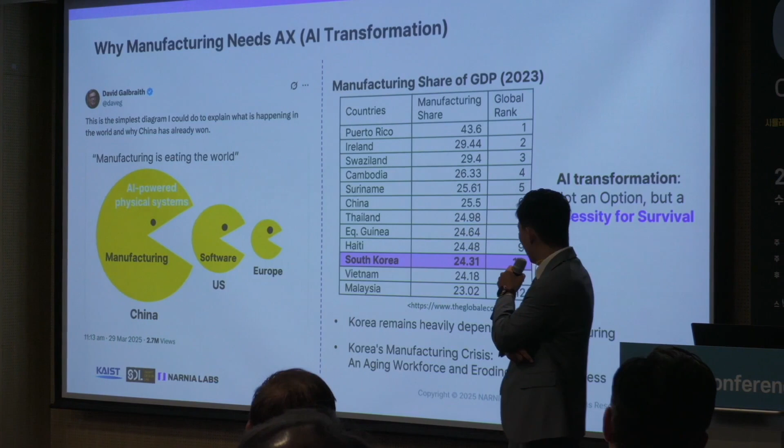It's changing. As you all know, manufacturing accounts for over 24% of our country's GDP. Even now, if you look at the rankings, we're in the top 10 globally. In fact, since the percentages are almost identical, it's safe to say we're tied for 6th or 7th. Our country is still heavily reliant on manufacturing, but you're seeing the problem in all industries, right? With population decline and a shrinking young workforce, there are hiring issues, hiring experts, and falling behind China in terms of price competitiveness. We're bound to fall behind in the competition for scale.

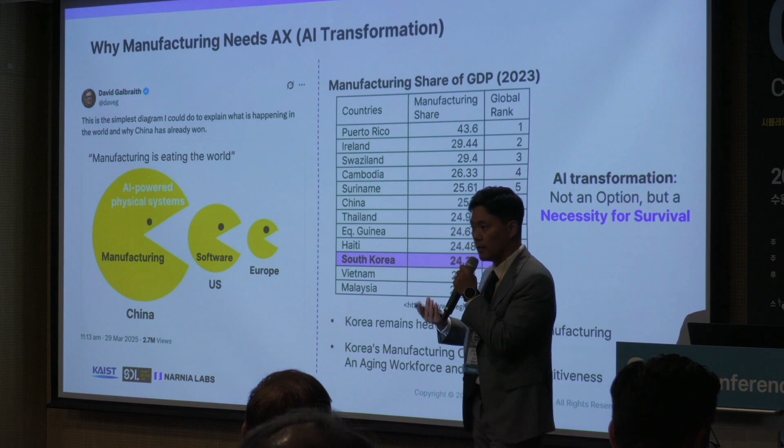So AI isn't the answer—it's not the only answer, but no other solution seems to be working. So we're now focusing on AI in manufacturing. I feel that innovation is not just an option, but truly a necessity.

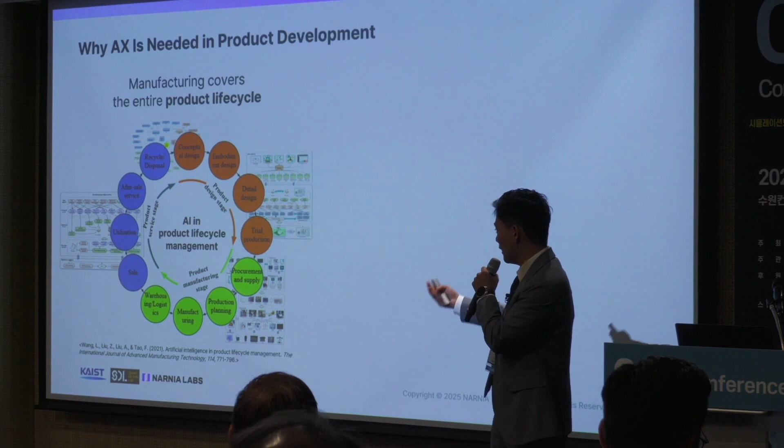When we talk about manufacturing, many people tend to think only of production, but in reality, manufacturing actually covers the entire product life cycle: planning, design, building, testing, production, distribution, management, after-sales service, and delivery. There are so many different specialized fields connected, including recycling.

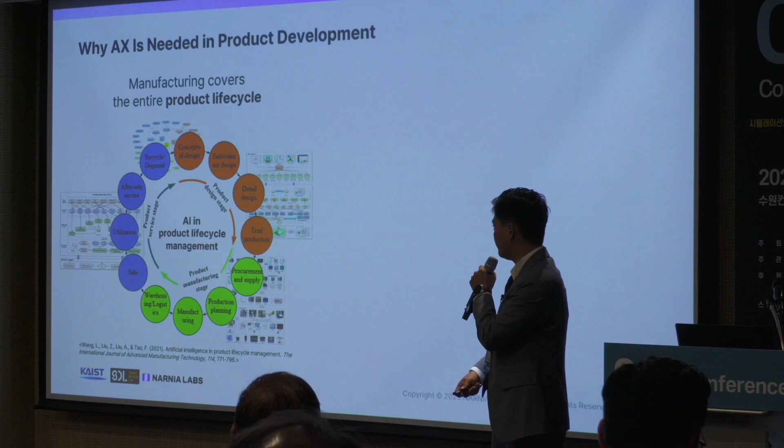If we make a table with added value for these fields, there is something called a smile curve—it looks like a person smiling. So when we look at it from the production perspective, the pre-production and post-production stages have high added value. In fact, we are jumping into that world. There are a lot of companies at both ends—the pre-production stage and the post-production stage—and many companies have made progress at both ends.

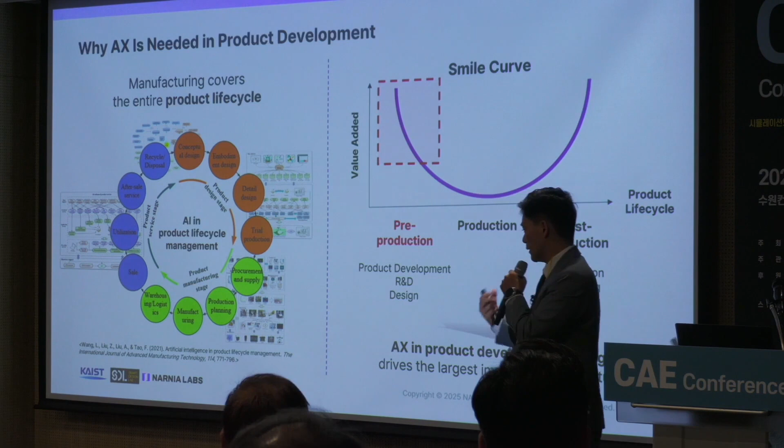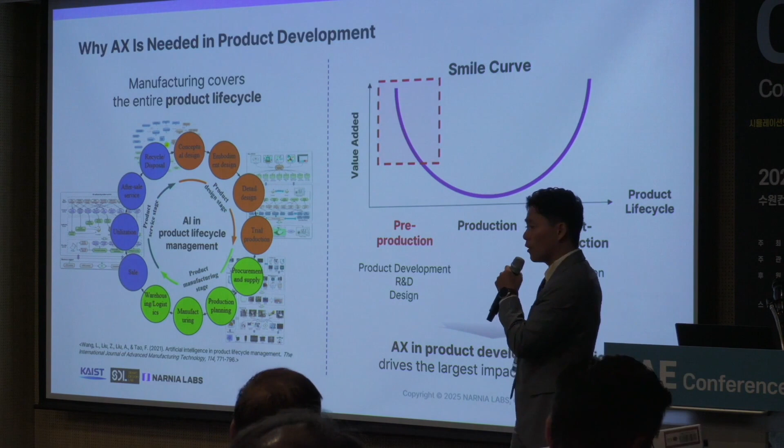So in the pre-production stage, before manufacturing and production, major work such as product development, R&D, design, and branding takes place. That means ultimately, if we innovate high-value-added areas with AI and achieve AX, the effect will be great. From our country's perspective, that's why we focus on product development—we can only truly see meaningful results if we actively innovate and improve that process with the help of advanced AI technologies. Of course, all areas and aspects are important and deserve attention.

Oh yes, I completely agree that AI is necessary for product development and design in Korea, especially as the industry evolves. Let's think about how engineering design is changing with AI from a broader and more comprehensive perspective. Here's my perspective on this important topic.

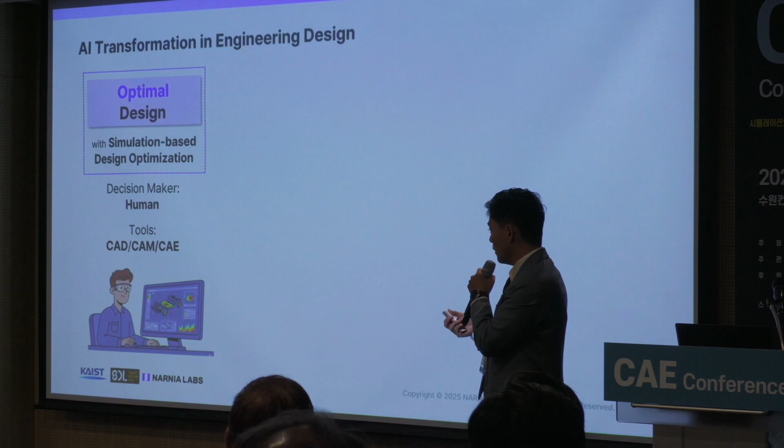I've been practicing optimal design for decades. My advisor was someone who spent his entire life practicing optimal design, and I learned from him. In a way, the most utilized optimal design is simulation-based optimal design. You all have many great CAX tools—CAD, CAM, CAE, etc. By using those computer-aided tools, people can do it faster and more efficiently. It was a time when we were developing products and we could optimize them.

However, we have been working hard at Narnia Labs and KAIST to transition from optimal design to generative design. Generative design attempts to change the paradigm of existing design by using generative AI technology as its core.

So now we have another great resource called AI for humans, but it's still not that great. Decision makers are people. Even though better tools have been developed, decision makers are still people. There is still a long way to go in the industrial field.

Generative AI isn't widely deployed in industrial settings yet. There's still much work to be done, and we'll focus on it, but we must continue to look toward the distant future. Then I believe the next era will be the era of autonomous design, or what we call agentic AI.

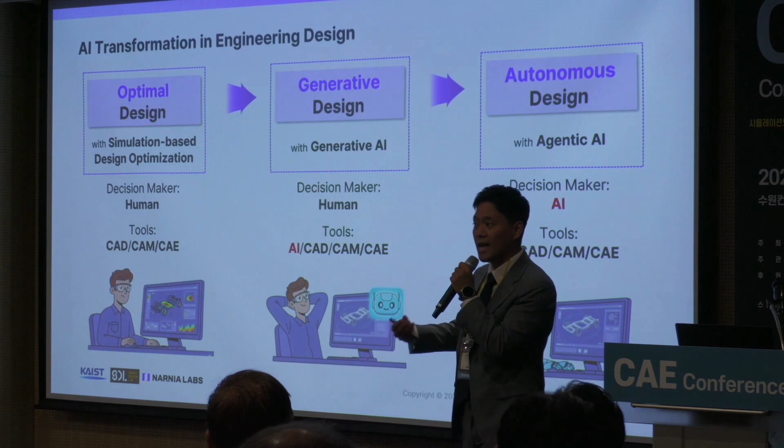I'll share my opinion on the differences between generative AI and agentic AI later. The key difference is that the decision maker is no longer a human, it's AI. The era of AI using AI to design is coming. While people have been focusing on designing using AI, the era of AI using AI to create good designs will come. Of course, people will also be involved.

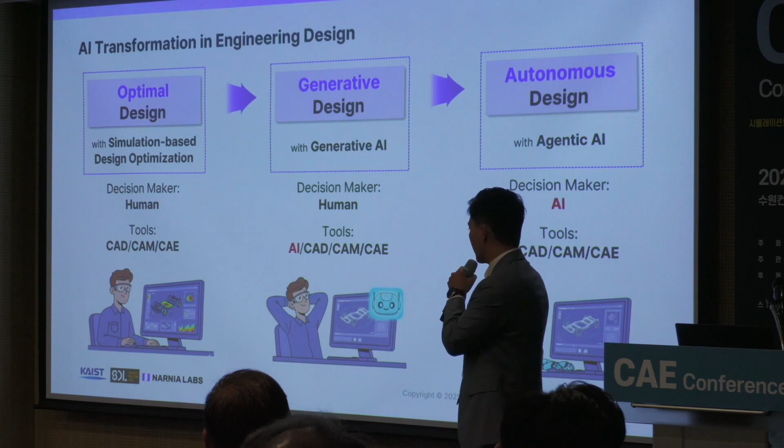Ultimately, it will likely be AI that performs evaluations and oversees the process. But it seems likely that many roles will be assigned to AI. So, within this larger picture, I'll first show you the efforts that Narnia Labs and KAIST have made in transitioning from optimal design to generative design, and then explain how we define the problem.

When we say simulation-based optimal design, the following process is followed. First, we define the problem. Defining the problem means defining the objective function, design variables, and constraints. Then, in the case of shapes, defining design variables means parameterization.

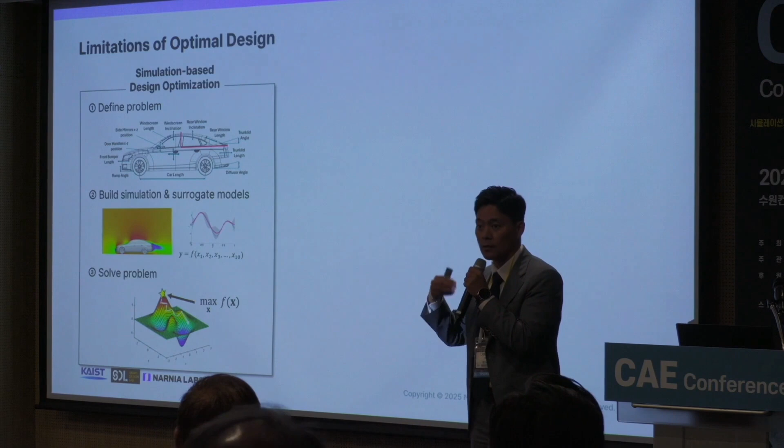So, after defining the shape with a small number of parameters, we change them and run a simulation. We gather that data, use machine learning techniques to create predictive models and surrogate models, and then use an optimizer to find the optimal values based on those models. We've been doing this consistently for a while now.

However, this approach has one fundamental problem. First, the designs we're trying to create often can't be parameterized. This is because the geometry is so complex that it can't be expressed from x1 to x16. Current machine learning techniques typically require the dimensions of input and output to be small, right?

Secondly, even if I could express the design I want with many design variables, I couldn't create a surrogate model for it. Existing machine learning techniques can't structurally increase the dimensions of inputs and outputs. Finally, even if I made such a function or a surrogate model, when models are highly nonlinear and complex, finding the optimal solution is hard.

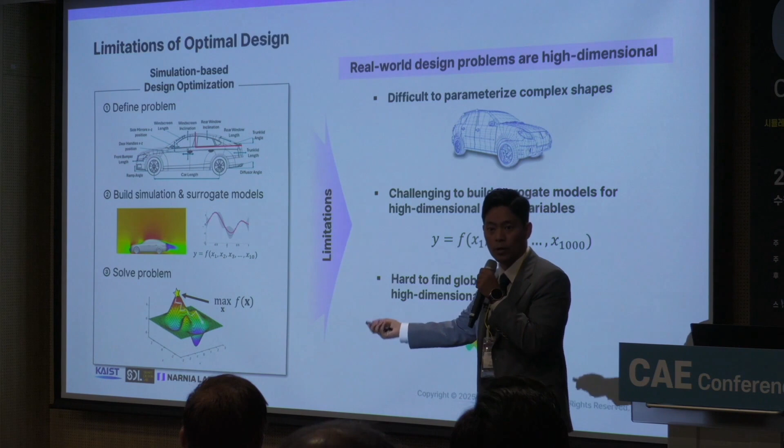So, the main limitation of traditional simulation-based optimal design is that real-world industrial design problems are extremely high-dimensional. So when we ask if AI can solve these problems, by AI I mean deep learning, which is the most prominent. The greatest advantage of deep learning is its ability to solve these problems.

It can compress a high-dimensional X space into a low-dimensional Z space. This is the ability to represent something that would require thousands of dimensions using just tens of dimensions. This ability serves to perform feature extraction or dimensionality reduction, which reduces the number of dimensions.

So what does this enable? Since it can extract features on its own, you don't have to parameterize complex shapes. It can independently identify key features and use them as input to create a surrogate model.

This means you don't have to do parameterization. Second, since dimensionality reduction is possible, while it's difficult to perform optimal design in 1,000 or 2,000 dimensions, it becomes much more efficient to do so by reducing it to 10 or 20 dimensions. And that low dimensional space is also well suited for generating new things. So from that perspective, this single page essentially contains the theoretical framework for performing generative AI-driven design optimization.

So there are three main modules: generative AI, predictive AI, and optimization AI. First, let's look at the meanings of X, Y, and Z. X represents the design, Y represents the engineering performance, and Z represents the compressed space. It's the space that deep learning has compressed X into.

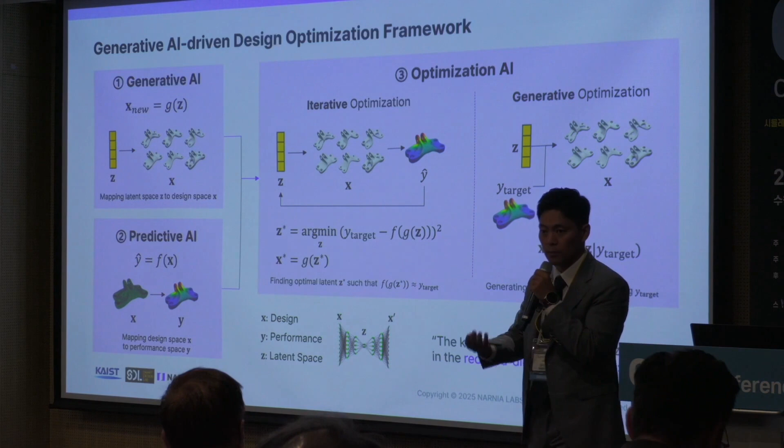The second method is to make the generative model conditional. So while you're still creating X from Z, you also input the desired engineering performance, Y. This is like telling the model, find a design that satisfies this engineering performance, or optimize for it, or generate it. So to summarize the key idea in a single sentence, the advantage of performing optimal design with generative AI is that you can do it in the reduced dimensional space.

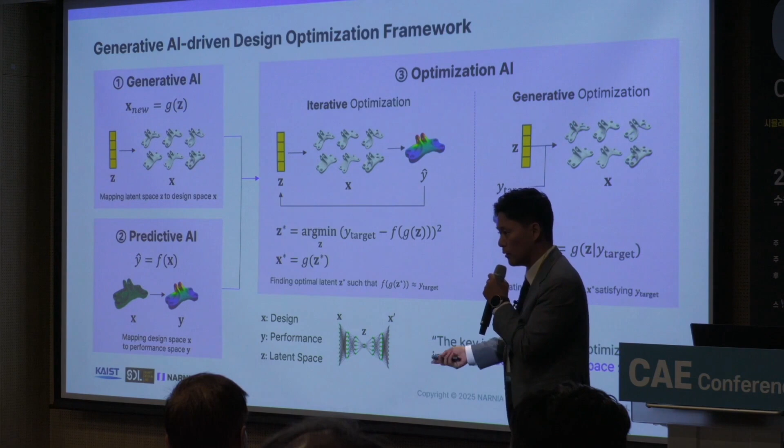All right, so, well, there won't be any more mathematical formulas from now on, so you can relax and just watch. AI is now multimodal, so 3D data, 2D data, and 1D data can be input in any combination, and 3D, 2D, and 1D results can be output in any combination. So the data you typically use for design can all be represented this way.

3D would be, say, CAD, and 2D could be an image from a specific view, or design, or an image from a specific view. And 1D typically represents all numerical values that can be expressed in Excel, like material properties, all those kinds of values. And the outputs could be values from CAE analysis or results from testing.

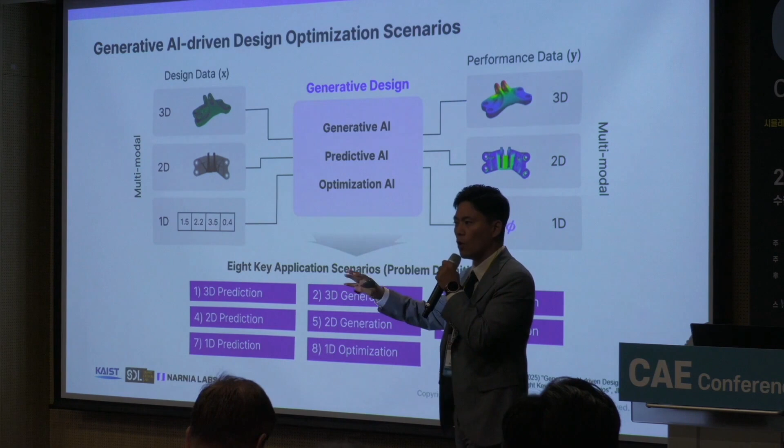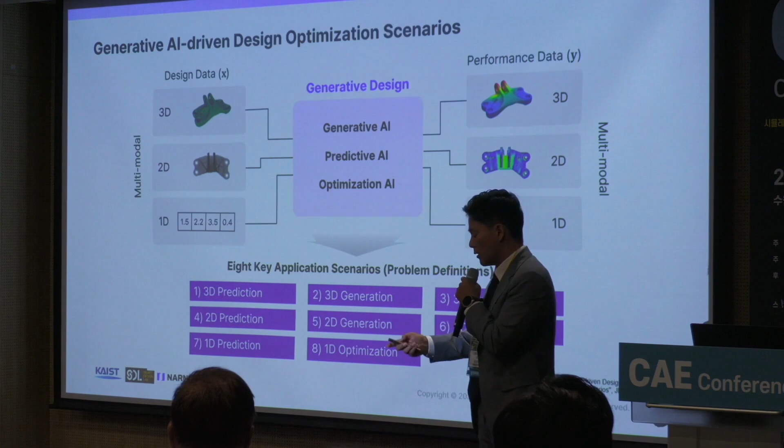Thinking along these lines, by combining these different modalities, we can categorize the common problems we're trying to solve. It's like creating a menu, in a sense. So we have 3D generation, 3D prediction, 3D optimization, then 2D generation, 2D prediction, 2D optimization, and 1D prediction, 1D optimization, and so on. Based on our experience, we've defined these problems.

First, let's consider a 3D design scenario. For 3D prediction, as you can see at the top, when we think about making a prediction, after the AI model has finished training, we provide it with a 3D CAD as input. Along with that, we provide the boundary conditions as 1D data. The AI will then predict the results of a CAE analysis or a test.

And when it predicts, it can predict 3D field values, or it can predict 1D scalar values. A 1D scalar would typically be a maximum value, or global stiffness, or something similar, while a 3D field value would represent all the nodal values.

Furthermore, the prediction can be divided into static or dynamic. Are we trying to predict a value at a specific point in time? Or are we trying to make a transient prediction as a time series? You need to use the optimal models that are appropriate for each case.

Once the prediction is made, we can then move on to generation. For generation, as you see below, we provide conditions to the generative model, the design requirements we want, and it generates a corresponding X. So ultimately, since we have both a predictive model and a generative model, we can connect the two.

So you can generate, then predict, then generate again, and predict again. Or you could even embed the prediction within the generation process, so you can generate while predicting. This way you can find an optimized 3D design. This is, in a sense, a very abstract representation of the process.

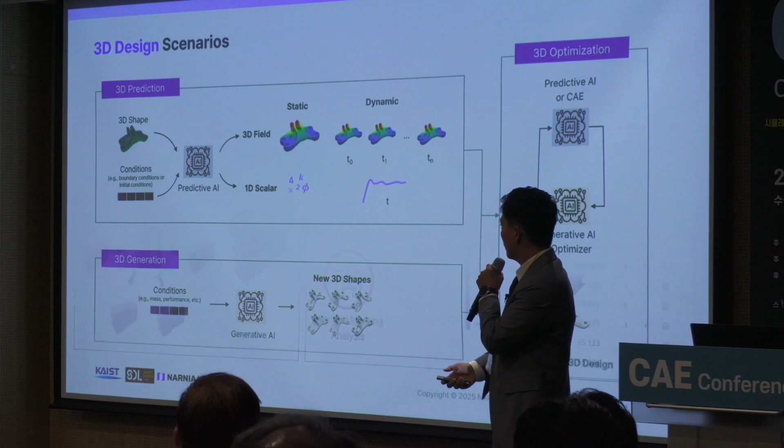Now, let me show you a real example. As a case study, this is a design for a molded case circuit breaker. From a 3D generation perspective, we start by non-parametrically generating various cases without parameterization. And for parts we want to change in detail, we can also apply deformation. This allows us to create a variety of CAD models.

We then train a deep learning model on the analysis results of these CADs to predict structural performance or outcomes like injection molding. Now that we have a generative and a predictive model, we can optimize as mentioned earlier. This lets us find the Pareto front, which is good structurally and for productivity. We can also rank each design alternative.

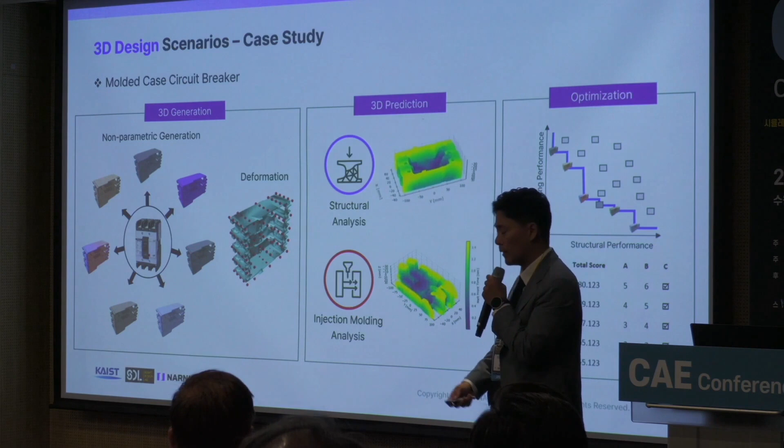However, some of you might be thinking, well, there are so many open source options these days. Can't I just grab some code from GitHub, train it on my data, and get a decent result? Yes, well, that might be possible. It could be. But here's the problem.

In this particular study, the data we received from the company consisted of just 28 shape data samples. We need to learn 28 pieces of shape data, and the 3D generation research in computer science, as described in the paper, relies on enormous amounts of data. And that data isn't our manufacturing data, but rather the small, bulky shapes typically used in the metaverse or games. The data we're trying to learn is always sharp, thin, and detailed, and it's a completely different domain altogether.

So when you think about it with a model learned in a different field, the expression open source comes out like that. Of course, I can't use it.

So if we do a very good and thorough job of pre-processing and optimizing the data to best fit the specific characteristics of our data, it really starts to take shape a little bit. Still, it's not enough. Then we choose the one that best suits our manufacturing data. We must tailor and optimize our data and model for manufacturing.

We need to create it, and then things get a little better, but it's still not enough. So purely data-driven design still has its limitations. So we mobilize all of our existing design technologies, rule-based post-processing and pre-processing technologies, and combine them with data-driven design. Now we can start to create somewhat more realistic shapes.

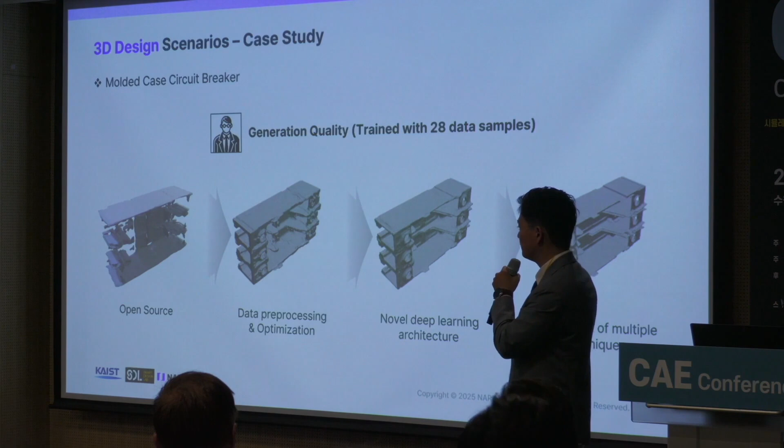In this particular case, we have now incorporated this 3D design into our CAD system as an API, which is an application programming interface. This is a case of collaboration with Siemens Korea.

For example, when designing a duct for a refrigerator, we input some specific engineering performance targets. Then, when we hit submit,

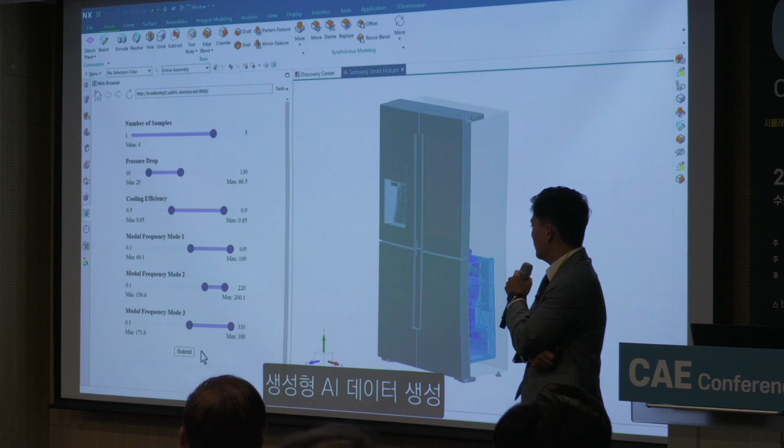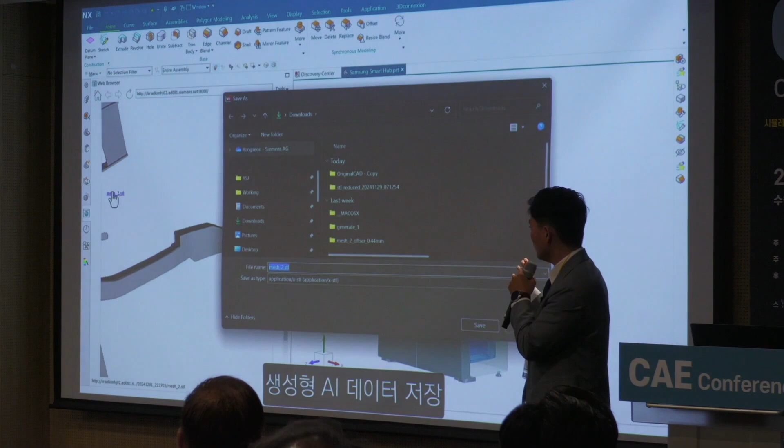I start by creating ducts behind the refrigerator, which is necessary to ensure proper airflow and help the appliance operate efficiently. In your approach, you created these ducts parametrically, meaning you used adjustable parameters to define their size and properties, making it easier to modify them later if needed.

However, in this case, you did not actually parameterize the ducts, so they were made with fixed dimensions, which can make future changes more difficult.

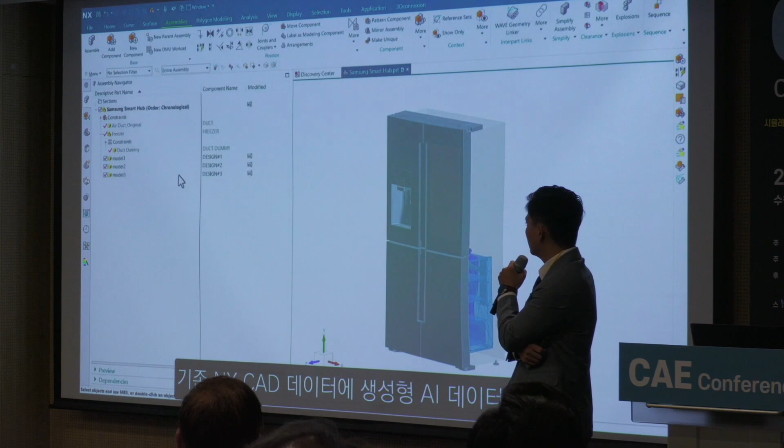After I finish creating the ducts, I download the resulting files to my computer. Once the download is complete, I upload these files to the server, which helps keep the project organized and ensures the designs are safely stored in a central location for future reference or collaboration.

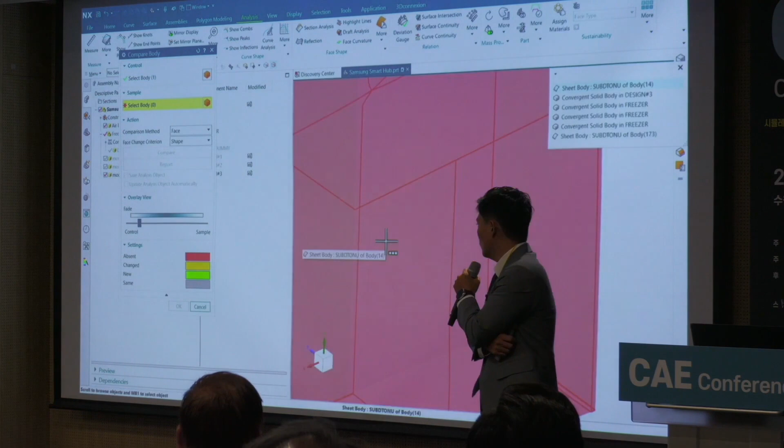I'll try it on my fridge, I'll stick it on to check its performance, and check for any differences with the original design. This was an example of how a trained AI model can be seamlessly integrated into an existing design process and workflow.

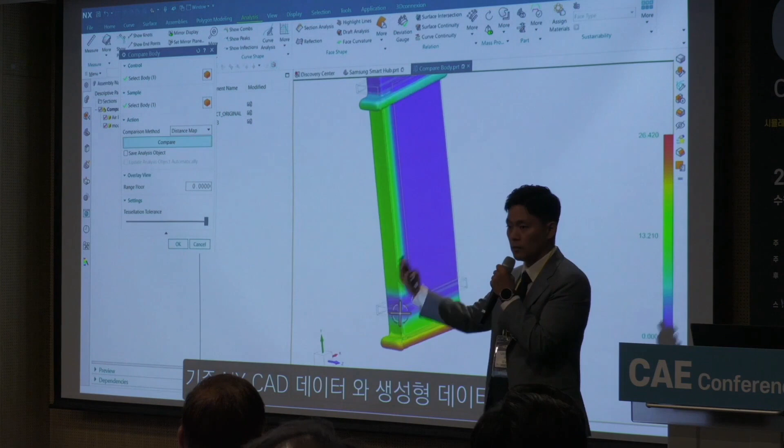So now that I've discussed 3D, let's move on to 2D. The concept is the same, but you might ask, why not just use 3D? Why use 2D? Well, since 3D is so complex, we're essentially reducing the problem to make it easier to solve.

Often a 3D CAD model can be adequately represented as a 2D depth map. In those cases, you don't necessarily need to keep the 3D data. You can just have it as a 2D depth map, or for many designs that have a uniform thickness, you may only need the cross-sectional information. In that case, you can just work with the cross-sectional design.

Using these representations, we can create a predictive model in the same way, just as we did with 3D. Now, for the generative model, directly generating in 3D is quite difficult due to data issues and the models becoming very heavy. But the advantage with 2D is that there are so many foundation models available, and we can leverage them very effectively.

So it's often more effective to first create a 2D depth map or image, and then reconstruct the 3D model from that 2D data. This approach works very well. By doing that, you ultimately perform the design optimization in 2D and then create the 3D model from it.

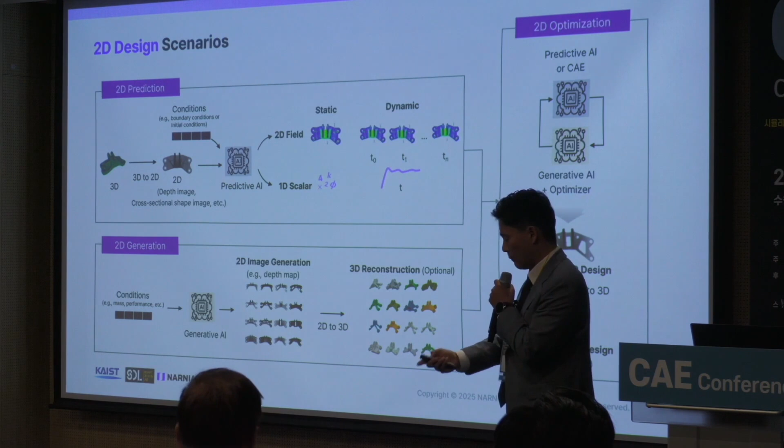Now for an example, let's take the case of a wheel. When we create a photorealistic wheel image like this, we're not just making an image that looks plausible. Instead, we predict the performance that would result from its 3D implementation. We consider factors like its stiffness and mass, and then create an optimized 2D image that meets those criteria. This is done by considering all the 3D properties.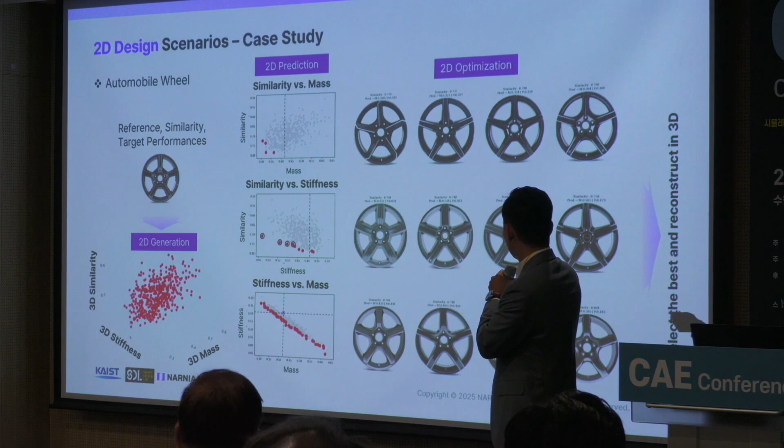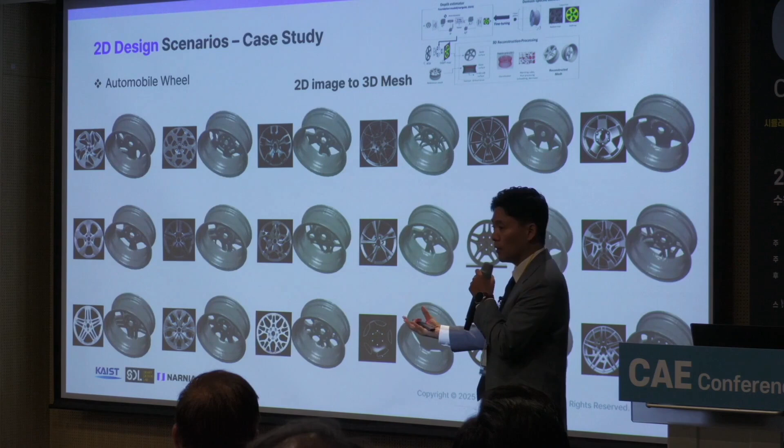Then using that image, we reconstruct it in 3D. After finding the optimized design, we use that design to reconstruct the 3D model. So for a problem that's difficult to solve directly in 3D, we temporarily move to 2D to solve it and then come back to 3D.

Now we're left with 1D. We've done 3D and 2D, so now it's 1D's turn. For 1D, generation is actually simple. Since it's already represented as a vector, changing the numerical values is, in itself, the generation process. Of course, you need to consider various probabilistic factors.

So then we can move directly to the predictive model. For 1D, the 1D table becomes the input, and ultimately, we again predict whether it's static or dynamic. But another thing we often do in 1D, although it's also possible in 3D and 2D, is multi-fidelity.

Most of you don't have a lot of high-fidelity data. The results from actual tests are very expensive, and the quantity is small. So we usually use low-fidelity data, like CAE data or 1D data, and utilize it effectively to make predictions. Once a prediction is made, 1D optimization is, of course, straightforward. You can just use the conventional 1D optimizer that we've always used. And then you can reconstruct it in 3D.

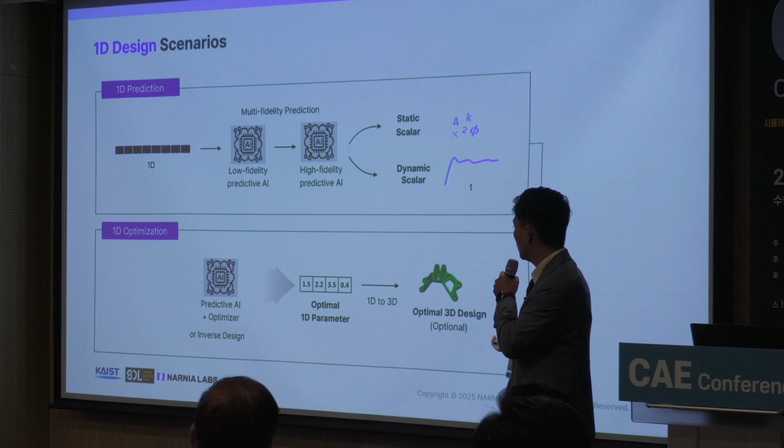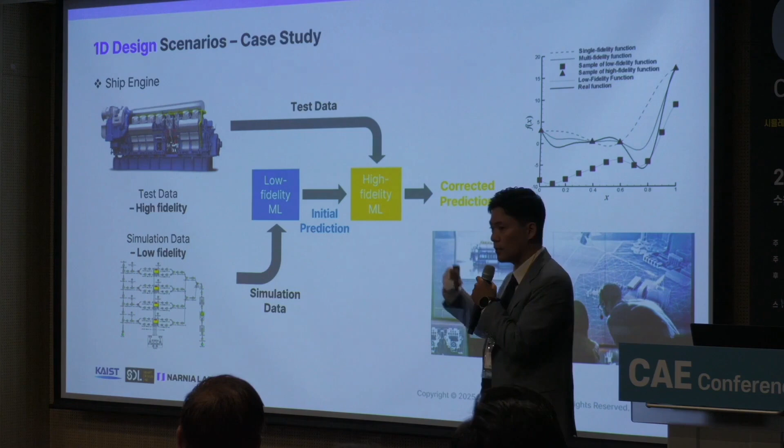As a case study, we had an instance where we predicted the performance of a ship engine. Test data for a ship engine is very expensive, so we used a 1D simulation instead. We gathered data for various edge cases from the simulation, trained both low and high fidelity machine learning models, and then combined them to achieve better predictive performance. That was the case study.

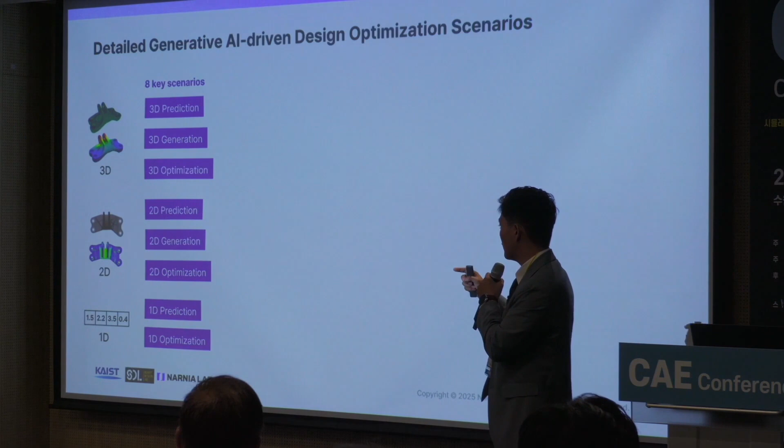So, looking at this, you can see that depending on the type of data we have, whether it's 3D, 2D, or 1D, we can divide our work into key scenarios: 3D prediction, 3D generation, 3D optimization, 2D prediction, 2D generation, 2D optimization, and 1D prediction, 1D optimization. And the detailed scenarios, as I mentioned earlier, depend on what we're trying to do.

Are we trying to predict a scalar or a field or a transient state? Are we just doing generation or conditional generation, or generating an assembly instead of a part? And are we doing iterative optimization or generative optimization? Many different combinations are possible.

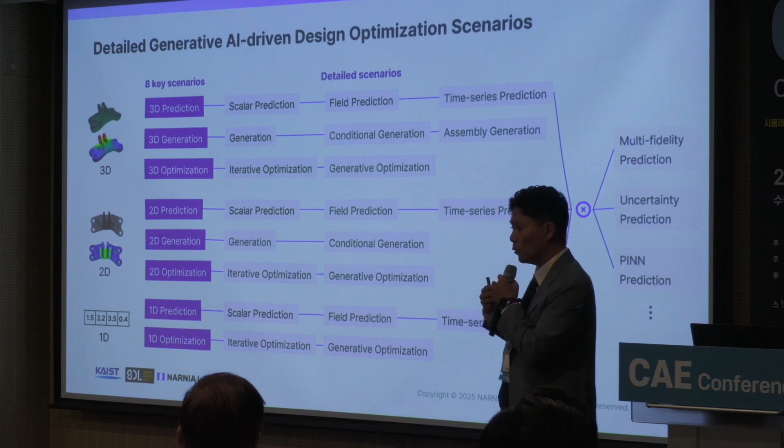Going further, let's say I want to improve predictive performance, then I can use multi-fidelity prediction. Also, if it's not just about the prediction itself, but I want to know how much I can trust it, I can predict the uncertainty. And of course, since data is often insufficient, we can also use predictions that leverage physical knowledge. So all these different combinations are possible. In a way, we've created a large menu of options. So over the years, we've solved about 70 different problems, and they all roughly fit into this menu.

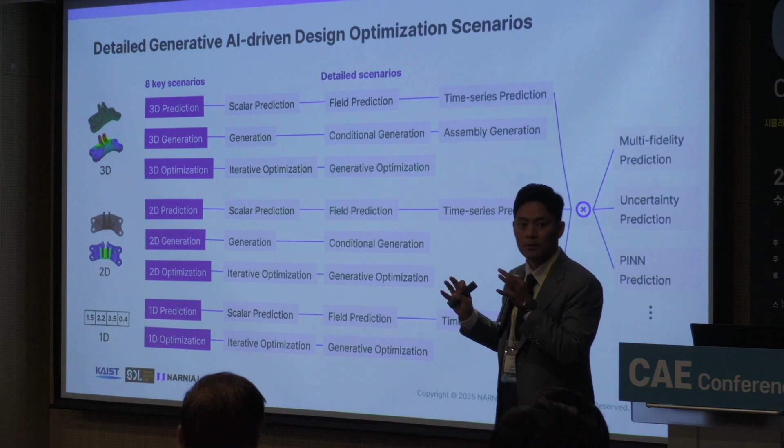So we've been solving a wide variety of problems like these. Typically, since automobiles have so many components and systems, and then there are electrical and electronics, power components, ships, robots, and recently, even small modular reactors, our applications have expanded to these areas.

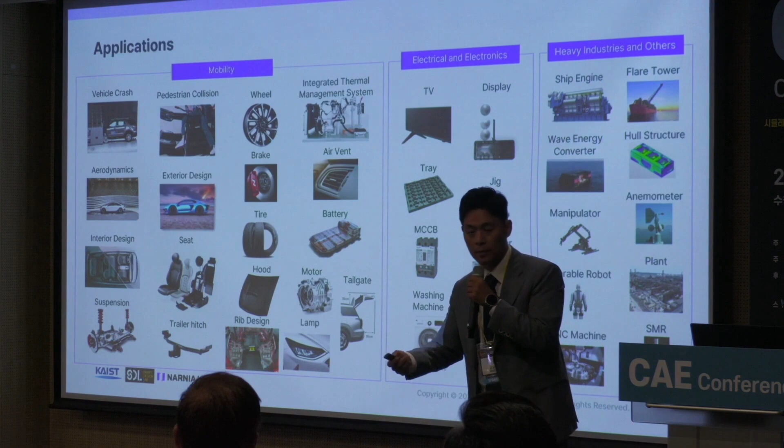We may know how to solve these problems, but how can engineers in the field easily apply these methods?

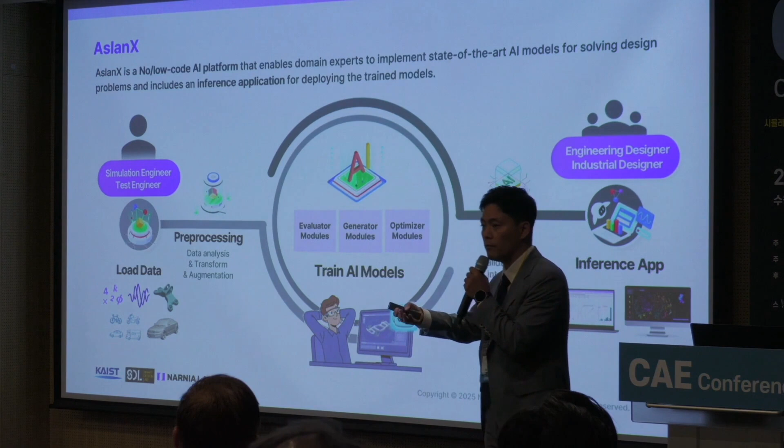Ultimately, what I wanted to do was create a tool. So we created a tool called AslanX. You can think of AslanX as a tool that allows experts in the field, like all of you, to easily train and deploy AI models. It's designed to seamlessly incorporate all of those scenarios.

So what does the user, the engineer, need to understand? They just need to understand this process, this flow. You import the data, and the tool automatically pre-processes it for the AI. Then you just define what the input and output are, the X and Y, and select which model to train. After it's built, you test it. And since other engineers will need to use the model you've created, you can then deploy it.

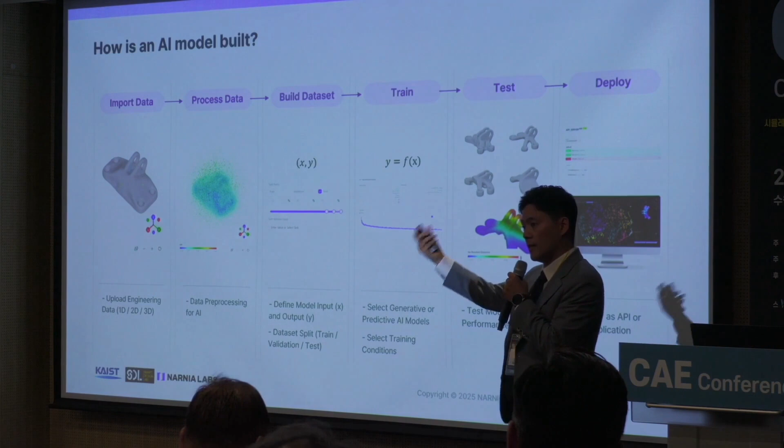These functions aren't performed through coding, but rather in a workflow format. Everything is done through a GUI. It's a format where you just need to change the values.

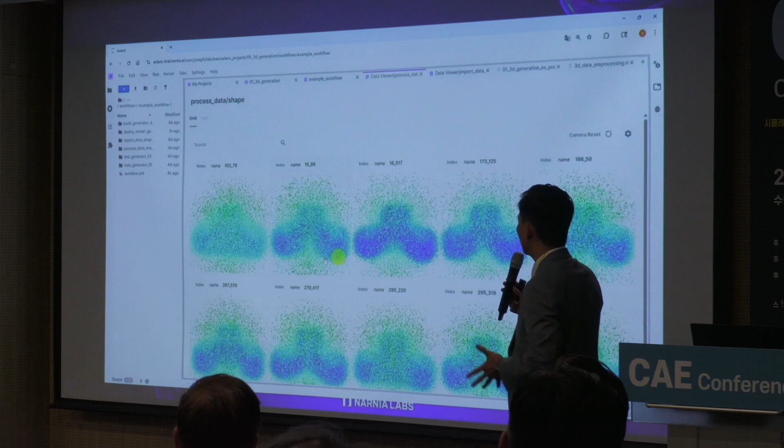So let me show you a quick demo. Let me show you the screen. You can train and pre-process 3D data like this, select a model, and generate.

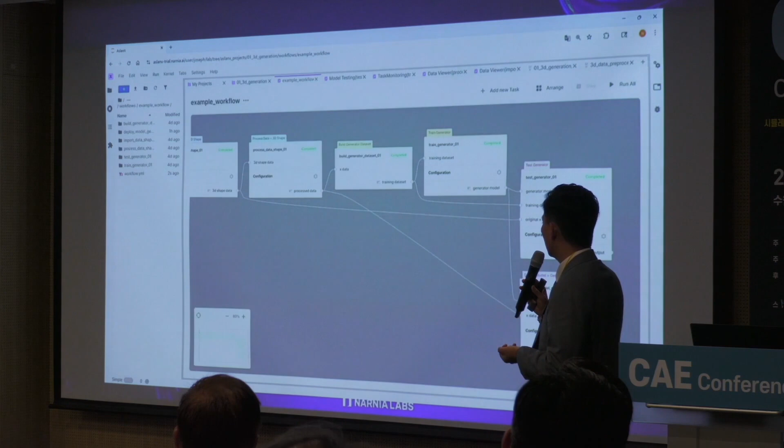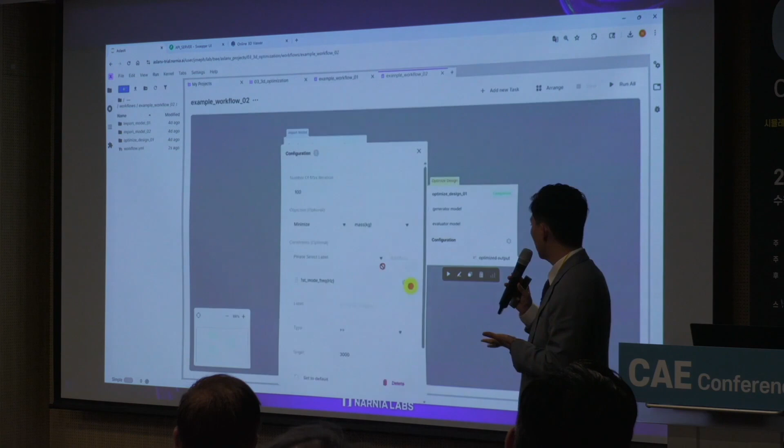You can also deploy the generated model as an API. The deployed model can then be wrapped into an app. You can import this analysis data, pre-process it, and then immediately predict the analysis results. You can immediately perform optimal design on the 3D results, and it handles 2D problems and 1D problems. So all the scenarios I mentioned earlier are implemented in this workflow format, making it understandable for engineers.

All right, so now what I want to discuss today is the final topic. We've worked hard on generative AI up to this point, but looking ahead, as we move toward autonomous design, what should we be thinking about? And what preparations do we need to make? I've been giving this a lot of thought myself.

So first, let's start with the terminology. I get confused myself: AI, agent, agentic AI. It seems there are slight differences in definition depending on who you ask. It's like back when the term Fourth Industrial Revolution first appeared and everyone was asking what exactly is the Fourth Industrial Revolution. However, the one thing that is certain is that as we progress from AI to agentic AI, the autonomy of the AI increases. This is a concept that everyone generally agrees on.

Whereas conventional AI was a simple form where we provide an input to get an output, an AI agent can select tools on its own and utilize them to solve problems. Then, when these AI agents gather and begin to collaborate, we call it a multi-agent system, which can solve more complex problems. And when autonomy is maximized to an extreme degree within that system, it's often called agentic AI. So in any case, the key aspects of this progression are autonomy, the ability to use external tools, and the capacity for collaboration. I think you can understand it in those terms.

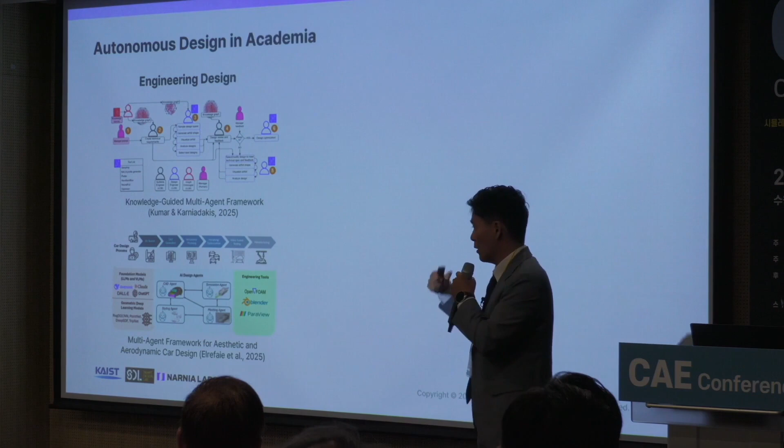So does this only apply to engineering design? No. In fact, if you think more broadly, it can include R&D, and even more broadly, it can include science. So if you look at recent studies using these multi-agent systems, a key characteristic is that they first utilize ontology. They organize past data, create a knowledge graph from it, and then utilize the relationships between different data points.

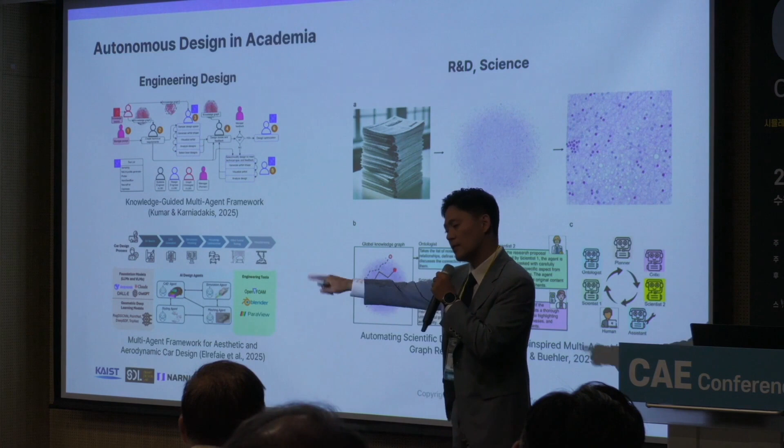And when creating this agentic system, they always include a critic, an agent that performs evaluations. So whereas in the past, AI was something that would start and finish in one shot, now it evaluates and keeps iterating to see if it's right or wrong.

So I took another look at these two perspectives, generative design and autonomous design. Time is flying. First, from the generative design perspective, as I mentioned, the human is still the decision maker, and the focus was on what should we make, what should we generate. I was like that too. But now with autonomous design, how to make it has become more important.

Because even to make the same thing, there are so many different processes and methods, how to collaborate to solve the problem becomes important.

In generative design, we kept looking at the design results, but now in autonomous design, we need to look at the design process. Instead of generating in one shot, it's about iteratively making and critiquing until the problem is solved. In the past, it was okay to be a black box because it just had to provide a solution.

But as we move toward autonomous design, if we're going to let the AI make decisions on its own, the results must be explainable. It made something well, but if you don't know how and why it was made this way, you can't trust and use it, right? As long as we entrust decision making to AI, it must be explainable.

And we should no longer look at it at the component level, but at the system level. It shouldn't be done in a siloed state, but in a networked state, linked with all other tools and systems.

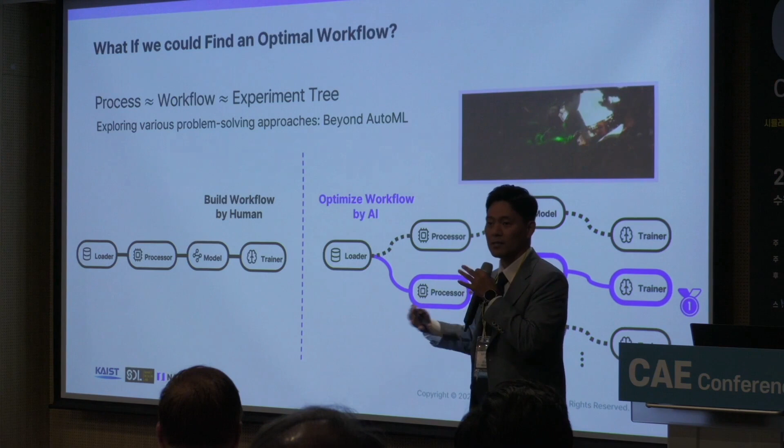You know, if you've seen the Avengers, when Doctor Strange is trying to defeat Thanos in the end, he considers countless combinations. He explores an enormous number of ways the many heroes could collaborate and fight to defeat the enemy, and then finally finds the one way. In a sense, it's that kind of concept.

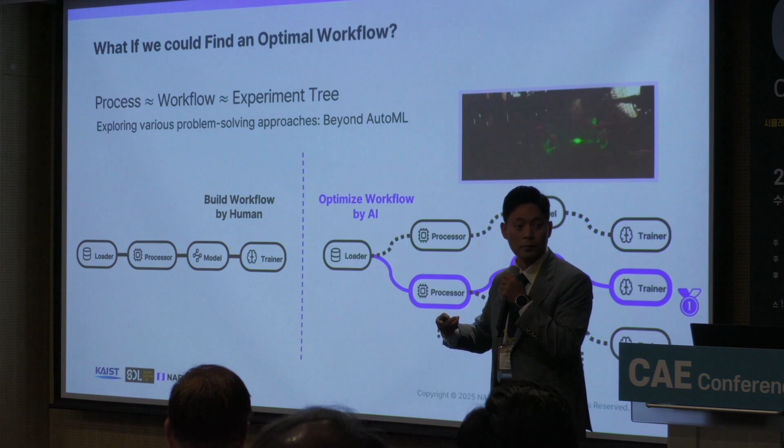So the direction we're heading in is toward this kind of autonomous design platform. Through ontology, we can effectively incorporate and utilize the design know-how from problems we've solved in the past, allowing the AI to autonomously create the best workflow to solve a given user's problem.

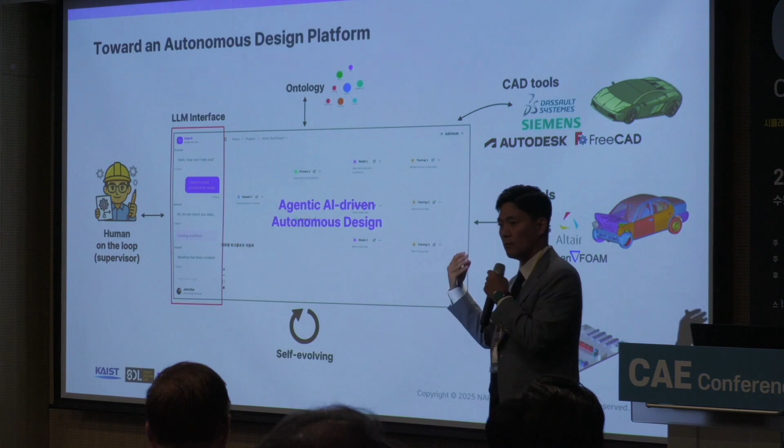In other words, it's about finding the how. By integrating well with existing high-quality commercial tools, we aim to create an AI solution that can ultimately evolve on its own. This is my last slide.

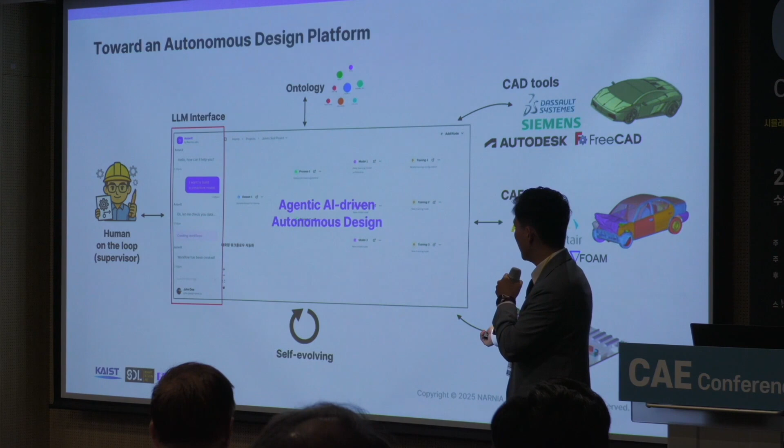So are we just talking about this? No, we've already started development. Now, when I input what problem I want to solve, it autonomously creates a workflow based on past information. It's not a human creating it, it suggests, I can solve the problem this way.

The great thing about creating a workflow like this is that a human can understand it. You can see this is the process it used to solve the problem, and then you can also review those processes. So next year, you'll be able to see our upgraded product.

To wrap up, earlier I explained why Korea needs product development AX now, and I shared my humble thoughts on how the future of engineering design might evolve. Of course, I don't actually know, how could I possibly know the future?

The best way to predict the future is to create it. I believe that Korea, which is already strong in manufacturing and recently became the country with the third most GPUs in the world, has the potential. So in this field of design, rather than just predicting the future, I hope that we can all create the future together. Yes, thank you.